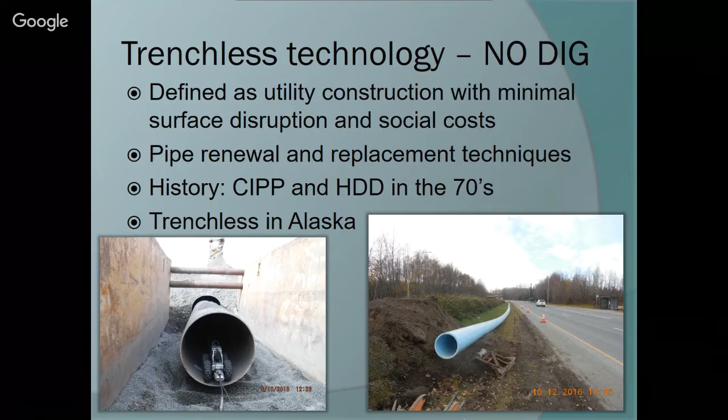I'm just going to go through a handful of different technologies. The first one's going to be slip lining, and this is an old traditional process. It basically is inserting a smaller pipe inside of a larger pipe. The word slip lining is oftentimes confused with cured in place pipe. Slip lining is basically putting a rigid pipe inside of another pipe.

The nice thing about slip lining is it can be done by general contractors. It doesn't require a lot of specialized equipment. You do lose capacity when you do this, your pipe becomes smaller. It's used for sewers, culverts, water mains, a lot of different varied utilities.

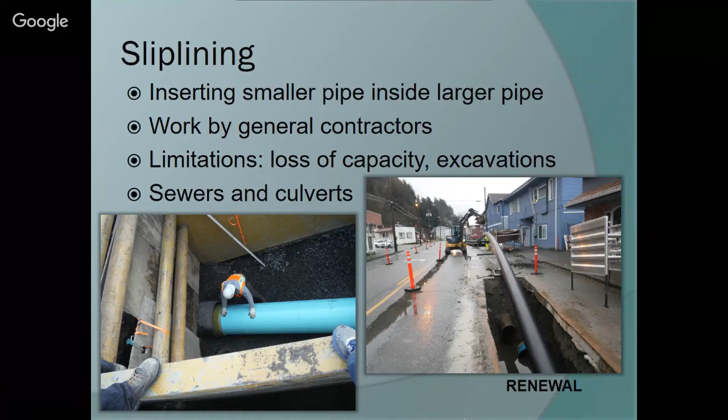In terms of Alaska, slip lining has been done here for quite a while. The first slip lining job I heard about in Alaska was done in Fairbanks in the 80s, when they actually used ductile iron pipe to slip line some techite pipe that was failing structurally. So it's a renewal process that can be done by general contractors.

These pictures here show a couple more slip lining projects. The one in the upper right is a large diameter culvert underneath the runway, where they used a CMP pipe as a slip liner inside of an older CMP pipe that was corroding. The one on the lower left is slip lining in a live flow condition.

This is done a lot in the States. This picture is from some work that was done in Anchorage, where they're able to maintain live flow while they're doing the insertion work.

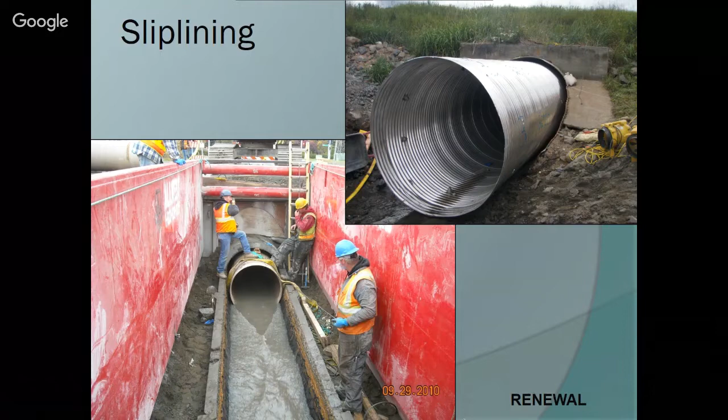Cured in place pipe. This is probably the most popular rehabilitation method in the world in terms of the trenchless world, and this is really one of the technologies that kicked the trenchless industry off, when they were able to find a way to repair pipes in the ground without digging holes. Mostly used for sewer applications.

It is being used for water applications now. You're basically taking a felt tube that has resin impregnated in it. It's soft, inserting it inside of a host pipe, and then using heat or light to kick the resin off, and it expands against the pipe wall and becomes hard, basically just like a hard sock inside of the host pipe.

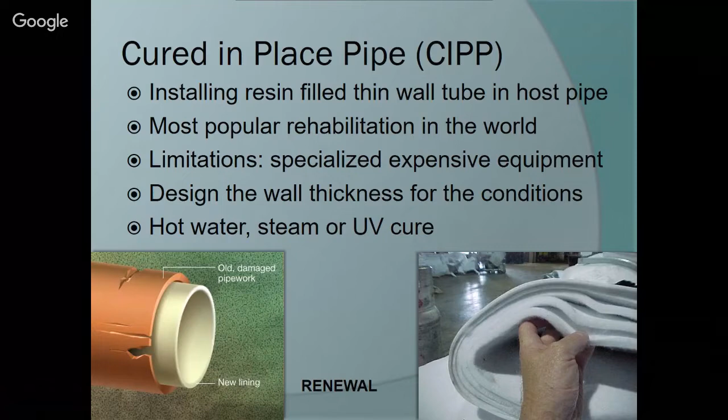It takes specialized equipment in most cases. As an engineer, you're designing the wall thickness of this liner to fit the conditions. It can be cured with hot water or steam, and nowadays there are newer processes where they cure liners with light trains. I'll have some pictures on the next slide that'll show that.

On this slide, the picture in the upper left is a UV liner before installation. In the lower left, you've got the light bulbs used during the UV liner curing process. The photo in the upper right is the more traditional insertion process, using water to insert the cured in place liner inside of a sewer pipe. The picture on the lower right is another photograph of a UV liner being inserted into a sewer main up in Fairbanks. Again, this is the most popular trenchless technology in the world today.

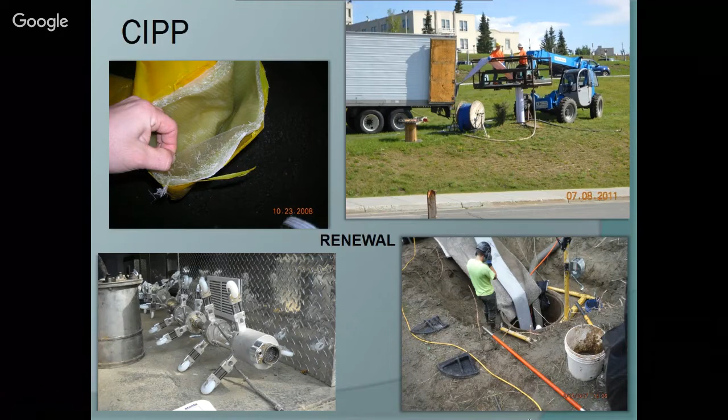On to the next one. So water CIPP is an offshoot of cured in place pipe, and it's a technology that really came into its own around the year 2000. It's semi-trenchless.

It does require some digging. You can see in the photograph in the lower right here where they have dug a pit to reach down to the water main, cut the water main apart, and they're inserting a liner into it. This was actually a water main that was lined out at the Anchorage airport. The picture in the other photo shows a water liner inside of a water main, the end piece of it.

They use epoxy resin in these liners for the most part. You can see in the lower bullet here some of the companies now doing it. You've got Aquapipe, Saertex which is a UV cure process, Nordipipe which is a system used exclusively in Canada, and then RS Technik, which is one of the newer players in this game.

This is a maturing industry. It really took off about 18 or 20 years ago, and it's becoming more and more popular as time goes on. Anchorage has actually done quite a bit of water CIPP work, and in the early years was one of the cities that did more of it than most other communities in the country.

Yeah. Yes. What's the difference between CIPP and water CIPP?

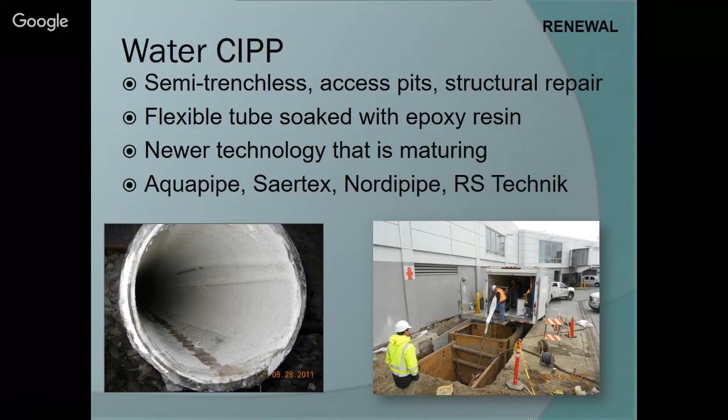Another part of water CIPP work is service reinstatement, and they can do this robotically without digging up the services. The picture on the right shows the robot going through the different steps, and the photo on the left is the robot itself. The driver observes it with a camera, positions it over the service, drills into it, and opens it back up with a drill tool.

They do the same thing in sewers too. When they install a CIPP liner inside a sewer, they can reinstate the service with a robot from inside the pipe and don't have to dig a hole. That's one of the beauties of that technology.

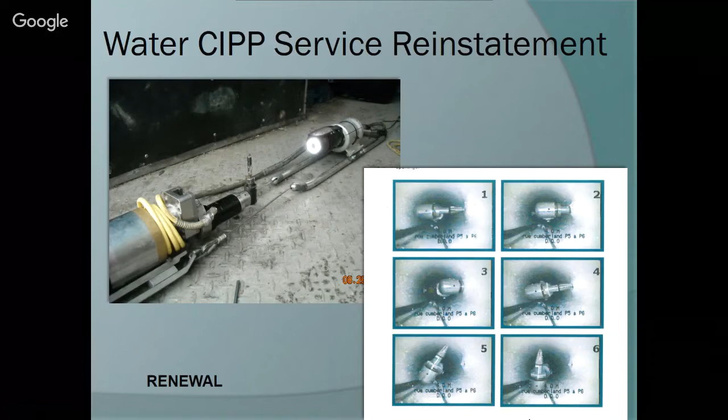Another technology in the trenchless industry is fold and form. It's a process used in specific situations. It was used in Fairbanks quite a bit about 20 years ago — College Utilities bought the process and did a lot of fold and form work within their sewer system where they had a global failure of some pipe.

Basically, you take a piece of PVC, heat it up, bend it, push it inside the host pipe, and then expand it. When it cools down, it stays in place and expanded against the host pipe. U-Liner is one of the more popular fold and form companies. This process is used in sewers and culverts. They've had some issues over the years with bonding or separation from the host pipe and shrinkage, but it's still in use today.

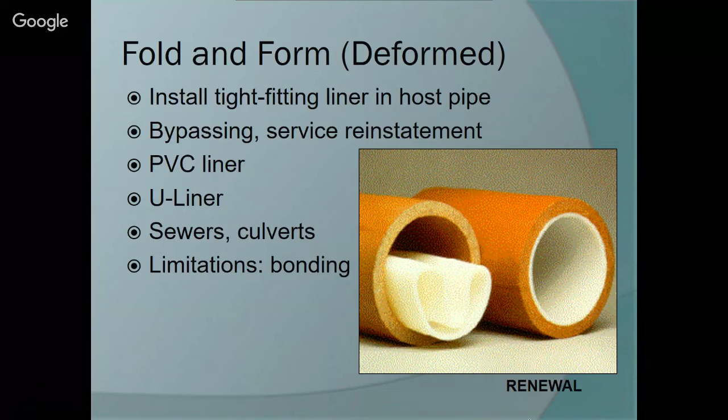Another trenchless technology is the tight fitting liner. This isn't a real mainstream process — it's a pressure pipe application a bit similar to fold and form, which we just talked about.

Sometimes it's called swage lining. They take a piece of HDPE pipe, fold it or shrink it to make it smaller, then pull it into a host pipe, and it goes back to its original shape over time. Depending on the thickness of the HDPE pipe used, it can either be a structural or non-structural repair. It's used a lot around the world in transmission mains and gas lines, in pipelines without service connections. It has been used in Alaska — I heard from an engineer at BP a few years ago who said they'd done some tight fitting liner work up on the North Slope.

So it's a technology you may never use, but it's out there.

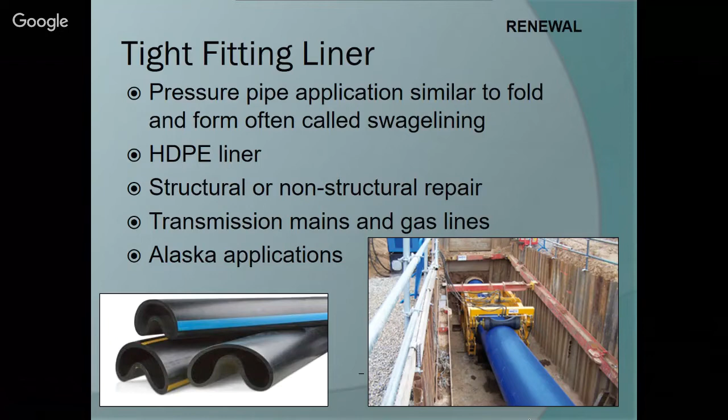Spiral wound is another kind of crazy technology used in our business. In this method, they take a thin piece of PVC pipe and spiral wind it inside of the host pipe, and as it's being sent down it locks in place with itself — you're basically building a pipe inside of a pipe.

It's used quite a bit in culverts. It doesn't fit tight against the host pipe, so they end up grouting the annular space between the liner and the host pipe to create somewhat of a structural repair. I've never seen spiral wound used in Alaska, but I think at some point it probably will be, considering a lot of culverts in Alaska are getting older and deteriorating. There's a high probability you could end up seeing this technology come to our state.

I've never personally worked with it, but I think it has a lot of possibilities.

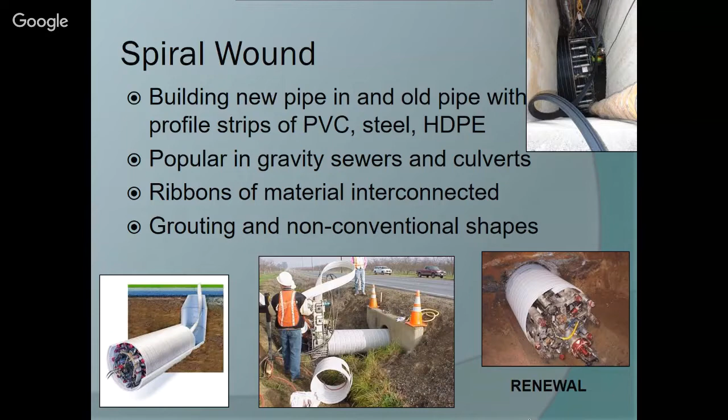Coatings is another offshoot of trenchless technology. It's basically coating the inside of a structure that's maybe part of a project. There's a lot of different types of coatings, and they're non-structural for the most part. You've got cement, epoxy, polyurethane. Some are sprayed on, some are hand applied.

Shotcrete is a system that I know there are tools up here in Alaska for doing, but we don't see it very often. One of the biggest reasons for coating is to corrosion-proof the inside of a concrete structure that may have been attacked from gases or something else.

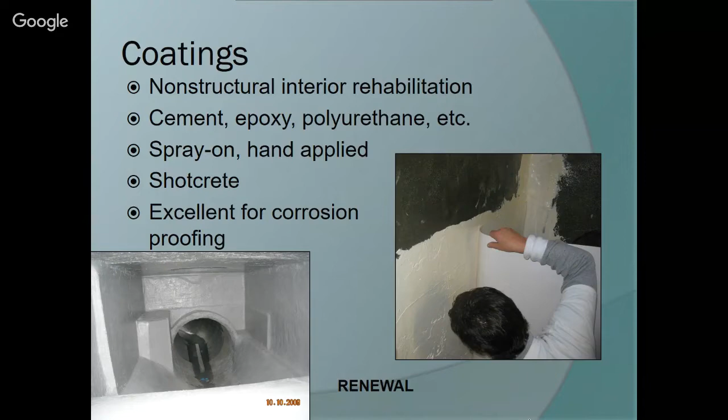Grouting is another aspect of trenchless work, a term that's used for a lot of different things that happen in the industry. It's a real popular tool with a wide variety of different types.

If you look at the pictures here, the photo on the lower right is a packer used to inject grout into a pipe joint to try to seal it up and prevent it from leaking. This is an old system that's been around for quite a while. The grout is pumped into the soil around the outside of the pipe, creating a kind of cement mixture that helps seal the pipe and prevent leaking. Grout packing like that is used quite a bit in projects where you're trying to prevent I&I from entering a pipe system.

The photo on the lower left is a slip lining project where grout was used to fill the annular space between a slip liner pipe and a host pipe. That's a cement-based grout, used a lot in Alaska on slip lining projects and other projects where you need to fill some sort of a gap, where you need a flowable product that can fill the gap.

In the photo in the upper right, grout's being applied by a worker inside a manhole, using grout to stop leaks and stop water from coming into the manhole. He's injecting the grout with a small handheld pump, pushing it into the soil around the outside of the manhole. It solidifies and slows the water down from entering inside the manhole — just one of the various aspects you see from using grout in our business.

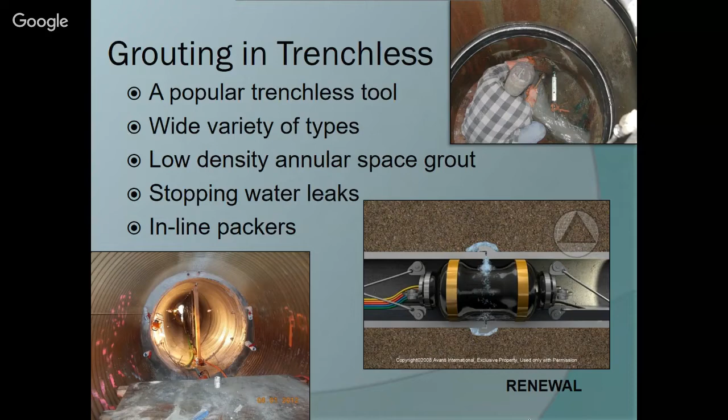Point repairs is one part of the trenchless industry that's growing. A lot of utilities are buying their own point repair equipment and using it to fix their own lines. It's something that workers can do. This is basically a short section of cured-in-place pipe used to repair a defect on a pipe that might otherwise be in good shape.

The way these things work: the crew will have a bladder system that's maybe 3 or 4 feet long, or whatever length you want. They'll put a piece of cured-in-place liner around it that's still soft, drag it into place, position it over the leak, inflate the bladder, and it presses the patch — the little piece of cured-in-place pipe — against the defect in the host pipe.

A camera's involved, and sometimes you have to control the flow when you do that, but it's an inexpensive way to fix a pipe that's otherwise in pretty good shape. It also prevents digging in places where you may not want to dig, for example in busy roads or other places where there may be a lot of activity on the ground surface.

I think AWW has their own internal point repair system, if I remember right. Yeah. So, very low cost, very popular now with utilities — we see more and more of these coming into the state.

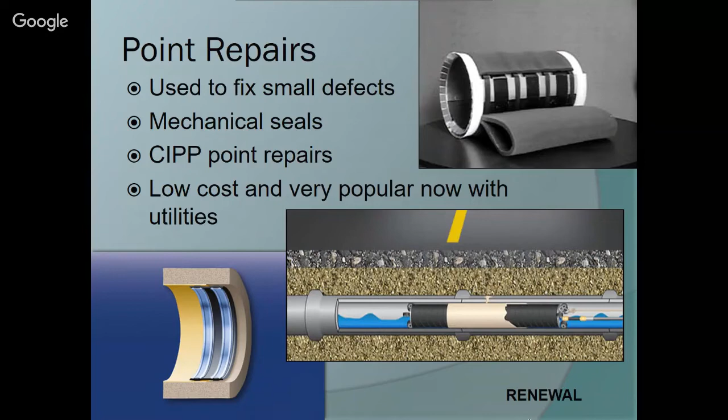Directional drilling: this is a pipe replacement system for installing a new pipe in a new location.

You heard me talk a little bit about fixing existing lines. Now we're getting more into installing new pipes, which is a huge part of the trenchless technology industry.

Directional drilling really took off in the 70s, and really kind of launched the trenchless industry today. It was a big part of it.

You see directional drilling done in a lot of places, and we see more and more of it in Alaska. This is a surface-launched drilling system that can be guided, and it's steerable. It has a lot of flexibility in terms of where you can put a new pipeline.

There's drilling mud involved in it. The mud is used to remove the cuttings from the hole that they're boring, and it's also used to pack the hole to hold the soil in place as you're drilling underground.

There's electronic tracking systems that are used to track where the boring head is going. It's fairly accurate, real popular for new water pipes, sewer lines that are at a steep grade. It's not really good for sewer lines that are at flatter grades. You see a lot of electric and telecom wires being installed with directional drilling rigs now.

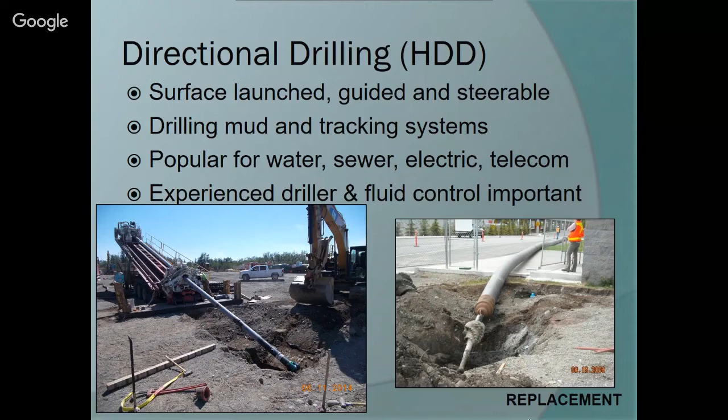For HDD, it typically can go up to about 48-inch diameter. Yeah, in the HDD business, they keep installing bigger pipes at longer lengths.

But they do some pretty cool stuff with HDD. It really shows up in river crossings and so forth. In the last 7 or 8 years, on long river crossings that might be 6,000 to 8,000 feet long, they're so good that they can drill from both sides and make a connection in the middle of that bore path with two different drill paths. They don't have enough strength in the drill rig to drill from one side of the river to the other because it's too far away, so they have the ability to come and meet in the middle and hook up in the center of the bore path underneath the river. Pretty impressive.

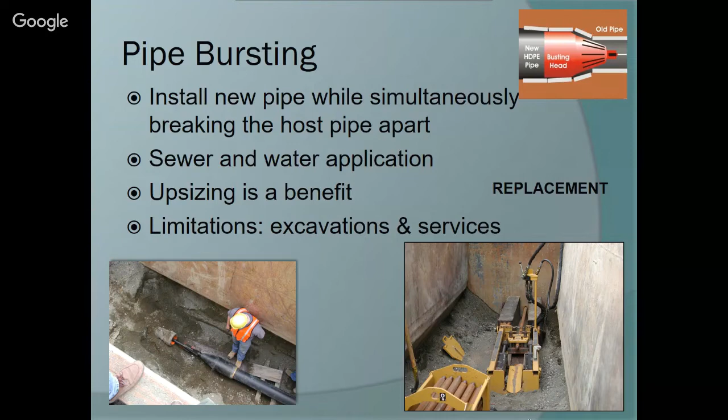Auger boring is a boring system that probably a lot of people in this room are familiar with. It's been around a long, long time. It's an old system where the auger boring equipment basically pushes a casing in place and uses an auger to remove the soils as they're pushing the casing forward.

It's done a lot under railroads or roadways. Auger boring is awfully limited in length—maybe 100 to 150 feet might be the optimum length. Diameter-wise, auger boring typically can reach up to about 54 inches in diameter.

One of the downsides is you have to dig a pretty large pit. The auger goes in a straight line, casing goes in a straight line—it's really not steerable. What's important is that you get it on the line and grade that you want when you first start, so that it ends up roughly in the place you want when it gets to the other side or the end of the bore.

There's some limitations with high groundwater or loose soils—auger boring tends to have problems with those kind of soils. So there is auger boring equipment in Alaska, and it's used quite a bit. The equipment here has done quite a bit of work over the years.

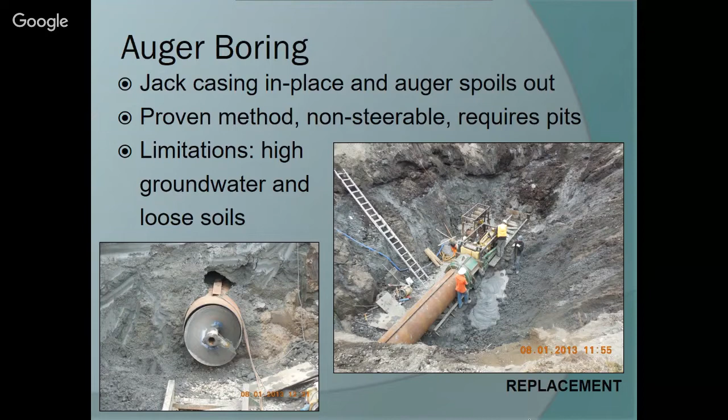Pipe ramming is a little bit like auger boring. You're digging a pit to lower the equipment into. It's a non-steerable technique for the most part—you're pushing a casing into place. The difference is that the casing's pushed in with a pneumatic hammer, whereas with auger boring, it's actually pushed in with jacks, by brute force.

Pipe ramming is a pretty cool technology. It hasn't been used a lot in Alaska, but I really think it's going to grow here—we'll see more of it. It's oftentimes less expensive than auger boring, and I really think we'll see more and more of pipe ramming as time goes on here. One advantage is it can be used for pretty large diameters, up to 12 feet.

What they do is they just push that casing in with brute force. And then once it's in place, if it makes it from one end to the next all the way through the bore length, after the pipe is in place, they go inside of it and pull the soil out. Depending on the size of it, they'll use different equipment to remove the soil. One advantage is that you really minimize the potential for creating any voids in front of the pipe ram.

It's also pretty successful with tough soils that might have a lot of rock in them. Essentially, they'll beat this casing right through rock or any kind of marginal or tough soil.

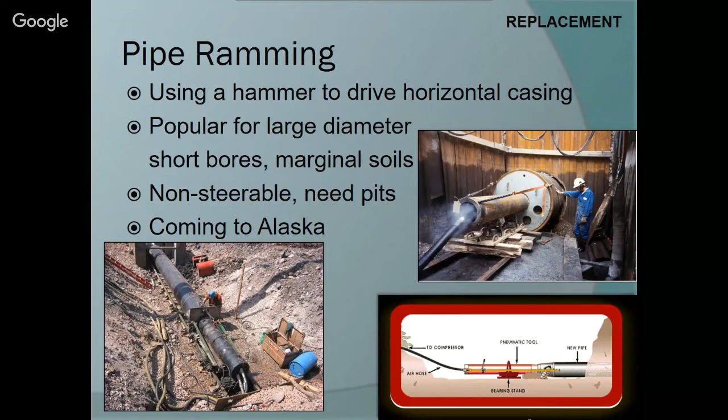Microtunneling is pretty cool technology. I don't know that there's ever been any microtunneling done here. It's very popular in the lower 48, especially for long, deep, large diameter pipelines, where big cities are trying to go from one point to the next. They'll use microtunneling to basically tunnel underneath the city, oftentimes at 50 or 60 feet below the surface, and create a pathway for maybe a large diameter sewer or large diameter water pipe. It comes in a lot of different sizes. You can see from the photo in the upper right, these are a bunch of different microtunneling rigs all lined up next to each other. And it's controlled remotely, different than tunneling where you might have a person in there.

Non-entry. The cuttings are removed either with a slurry or some other type of process. And as the tunneling machine goes through, a little bit like pipe bursting, they tunnel along, the casing is going behind it, and they're building a pipeline as they're drilling along. One of the biggest advantages is it's guided, so you can keep it on grade or where you want it to be.

They sometimes do get great accuracy, and with microtunneling, you can drill through almost any type of soils. I've seen projects where, like I said earlier, microtunneling is often used for deep, large diameter pipelines in cities where they have a lot of congestion on the ground surface. But I also saw a presentation where they used it on the East Coast in an older colonial aged community.

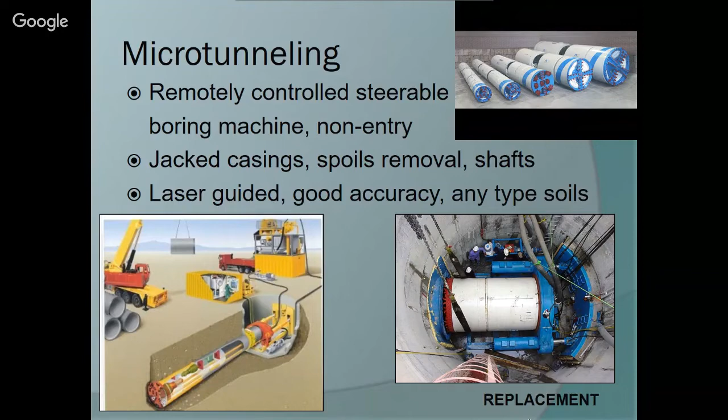Pilot tube microtunneling sounds the same, it's like the question you asked about CIPP. But this is more of a smaller diameter system. This is a laser guided boring limited to about a 500-foot length, for small diameter pipes and pits.

You need to have ideal soil conditions to use PTMT. Very accurate, popular for on-grade sewers, especially in the States where you want to put a pipe in from one point to the next in the middle of a city, for example.

The tooling, the equipment itself, doesn't take a large pit in some cases. The picture on the lower right shows pilot tube microtunneling equipment that fits about in the size of a trench box, a 20-foot long trench box. But in the upper corner is a picture of a microtunneling machine that fits inside of an 8-foot diameter casing. So it's used a lot, like in cities where you don't have a lot of room to maneuver.

They will construct a vertical casing, drop in this guided tunneling equipment, and they'll bore whatever distance they need to go, usually 300 to 500 feet. And when they're doing this, the augers and the casings are all very short, so they put them in short segments, one by one, as they move ahead and move back.

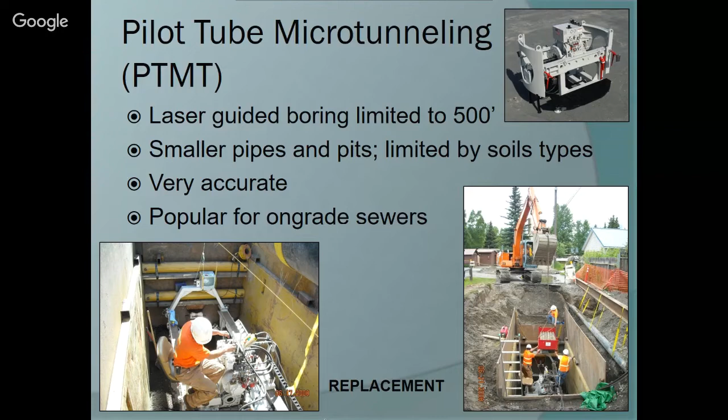Piercing is basically a pneumatic hammer that drives itself through the soil, unguided, and it's real popular for short electrical and telecom wires. I want to say maybe less than 30 to 40 feet.

This equipment is used in Alaska. I've never personally worked with it myself, but these hammers come in a bunch of various sizes, and they're driven by air, so they just pound their way through the soil. They're not pushed with any kind of mechanical equipment; they just walk through the soil themselves, and they're non-steerable. It's pretty crazy, but you don't really know all the time where they're going to end up at.

We've heard some funny stories about the piercing tool popping up out of the ground surface 20 feet from where it was supposed to go. In the States, or places with fine-grained soils without a lot of obstructions like gravel, it's probably a lot more successful, but it is used here.

It's just one part of this industry that's adaptable to the electrical and telecom industry.

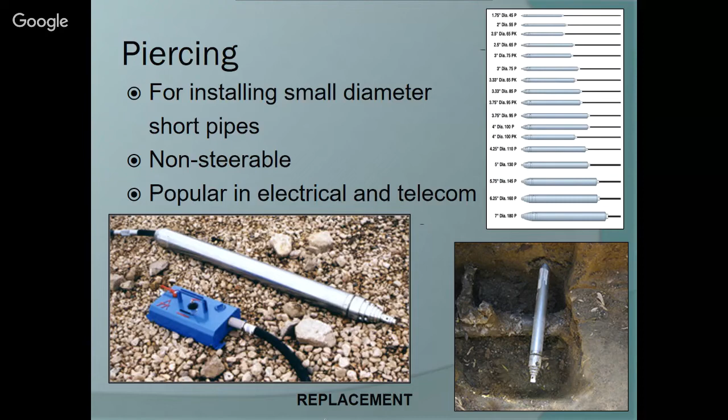A real interesting type of method for installing new pipes or new wires in the ground.

Another facet of the trenchless business is condition assessment. This is really about, if you've got a pipeline, trying to figure out what's wrong with it before you go to fix it. There are a lot of great tools nowadays for doing condition assessment, especially with the way electronics are being improved all the time.

It's important because engineers, to make a decision on how to fix something, need to know what the problem is. So cameras are probably the most used tool in condition assessment.

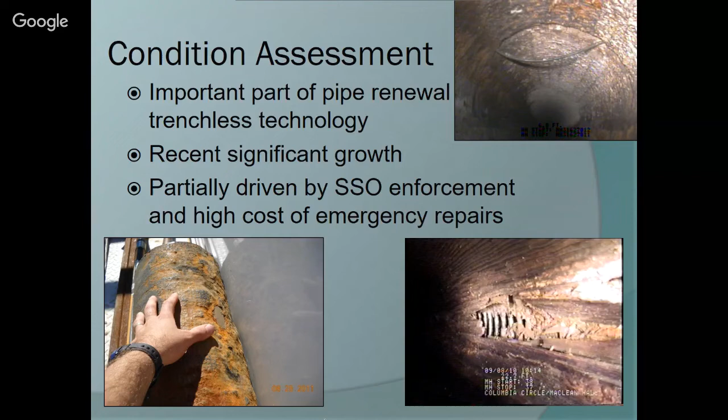I've got a few more slides on this that I'll show you that explain a little bit more about assessment.

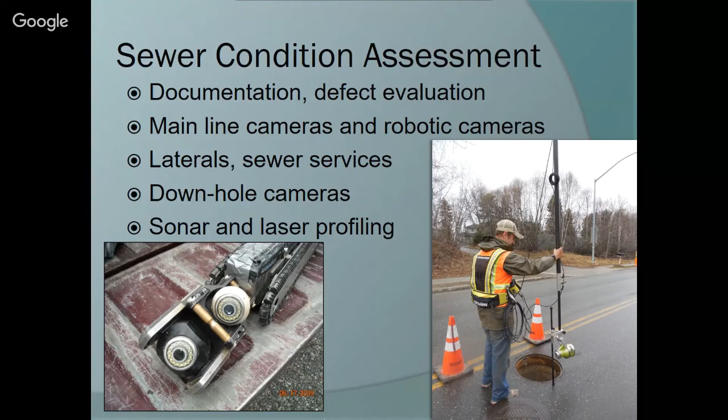In Anchorage, we're seeing more and more of these downhole cameras, and some small communities are starting to buy them too. Real useful tool, especially today when you have rules about climbing inside manholes and so forth that prevent you from doing that very easily.

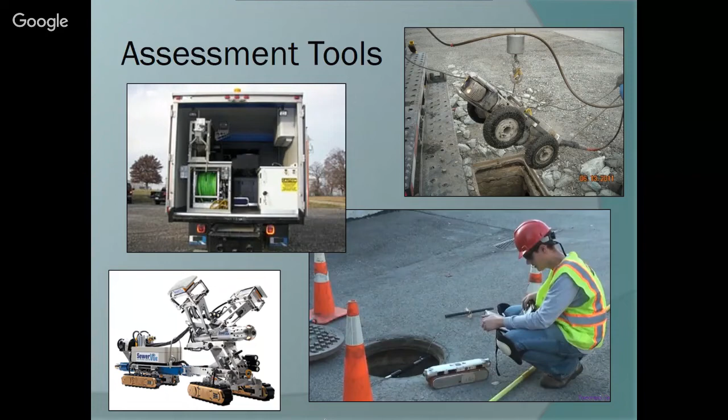Water condition assessment: there are a lot of new tools for assessing water pipes. Cameras are used. Oftentimes you have to stop the flow and open the pipe up, but there are cameras nowadays that can access water mains through hydrants when the pipe is still under a live flow condition. They're developing that stuff all the time.

There's some non-destructive techniques such as acoustic methods, which send signals through the pipe to assess pipe wall thickness. Non-destructive testing can be done by hooking onto valves and other components on a pipe system to send a signal from one point to the next.

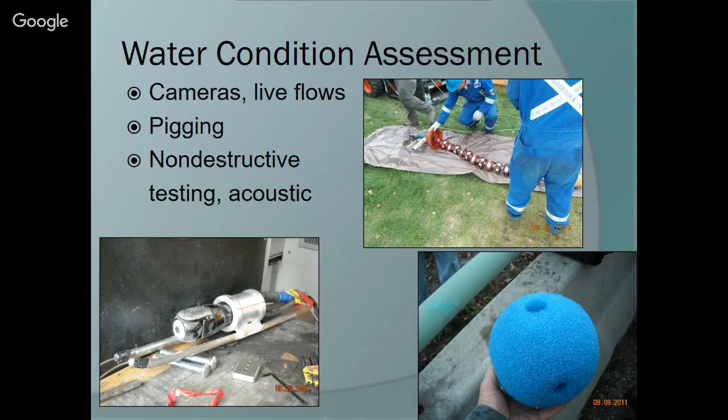Some of the organizations in this industry, and I'm just about done here. NASTT is a real well-known trenchless organization. They have a conference they hold every year in the States. There's a chapter, an offshoot of NASTT, located in the Seattle area.

Another organization that's a lot like NASTT is the UCT. They hold an annual conference and are based more out of Texas and the southern states. And then you've got NASSCO, which is more of a broad association of sewer service companies.

These organizations continue to grow and expand, and they're putting out great resources now, like design manuals and technical papers. A lot of this stuff is available online from these different groups to help people understand what's happening in our industry.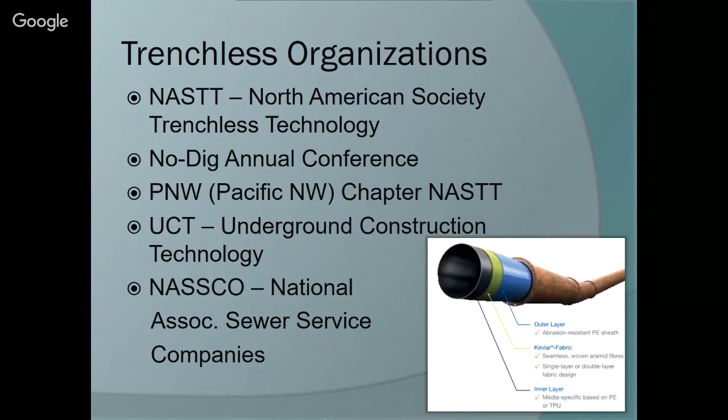One of the biggest advantages of the Primus Line is that it doesn't take a lot of specialized equipment to do the installation work. One of the downsides is that the hose inside is not structural, so it can collapse if you get high pressures from the outside. Anyway, just one of the newer technologies we see here.

In conclusion, our industry is just continuing to advance and mature, and I've been in it so long, I've seen a lot of that firsthand. It's amazing what people can come up with when they look hard at trying to find ways to do things. In our work, you want to often, especially on the drilling side, plan for the worst and hope for the best.

Because when things go wrong, they can be expensive in the trenchless world - for instance, if they're drilling and run into a utility by accident, or didn't do their due diligence to find out what was underneath the ground, there can be some catastrophic damages due to that. We often talk about risk in the trenchless industry, how to manage it and control it.

Fixing defective work can be expensive, and we've seen some projects where liners went in that cured too soon before they had a chance to inflate, and they had to find ways to remove them - oftentimes in places where you don't want to dig a hole. So it's important to do your due diligence ahead of time as much as you can to reduce risk.

I often warn people about being careful with unproven techniques. In an industry with a lot of research and development and new ideas, I've seen a lot of them come and go over the years. It's often important just to verify that they actually are doing what they say they can do, and maybe it's been used elsewhere. And with trenchless work, it's not always the most cost-effective solution.

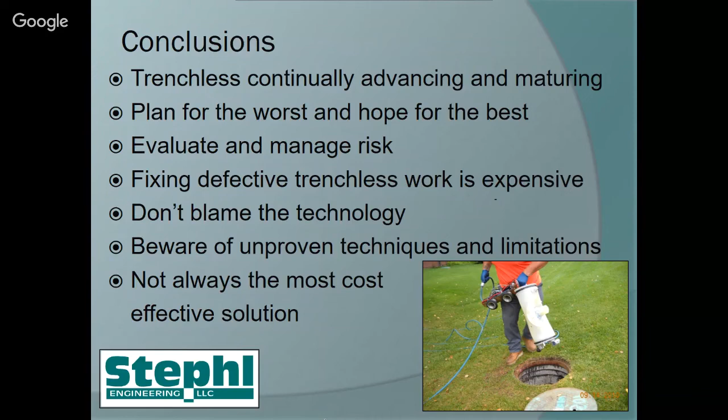In the drilling work, where you're drilling into a new location, if you don't know what the soils are, you're making a big guess on what you might run into. So geotech work is really, really important, especially in horizontal drilling, for example. As engineers, we do an analysis on whether the drill is going to be feasible, looking at a drill path and trying to predict if the drilling mud is going to make it back to the drill rig, or if the pressure is too high and it pops up to the ground surface. That's called a hydrofracture analysis, and the soils are a big component of that analysis. So yes, it's important to get good geotech information.

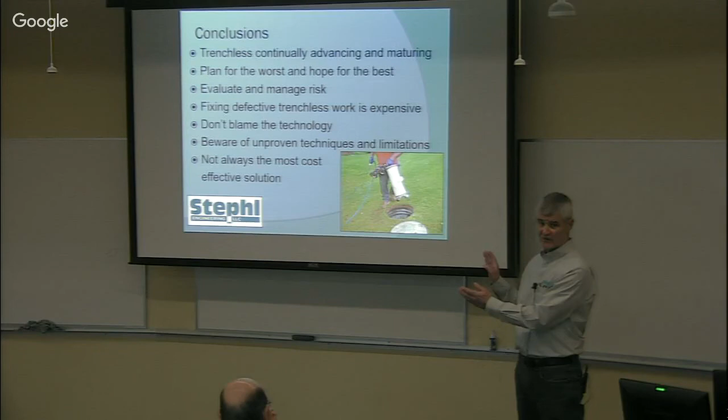Anybody else? Yes, sir? With CIPP, cured-in-place, NSF 61 for water is going to be a big component. That's what drives some of the technology there. So the question is about NSF 61 and how it relates to water CIPP, and you're absolutely correct about that. The lining companies that were in the bulletin for water CIPP all provide liners that are NSF 61 rated. That was a big deal in the early part of that industry, because the water CIPP liners were developed and used in Canada, and in order for them to move into the US, they had to get NSF 61 certified. They all went through that process.

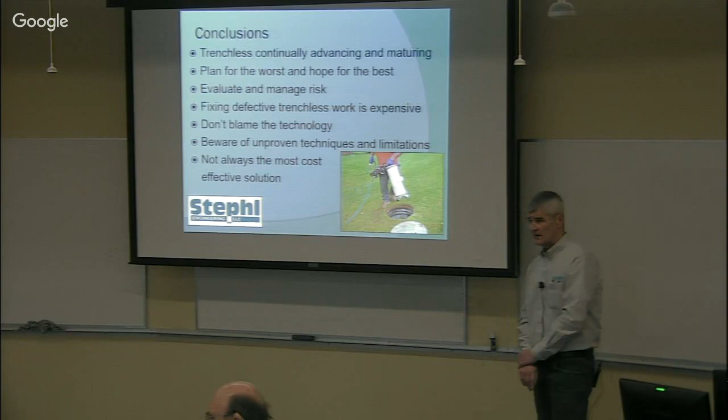Yes, sir? I was on a project not long ago where they ran a pipe under the road, and they pulled out more material than they needed, so it settled. Is that a common occurrence, or is there a way to measure your mud and soil to get back so you know? So you were on a drilling project where they created a void during the drilling process. Do you remember what technology they were using? No, I don't, I didn't get there.

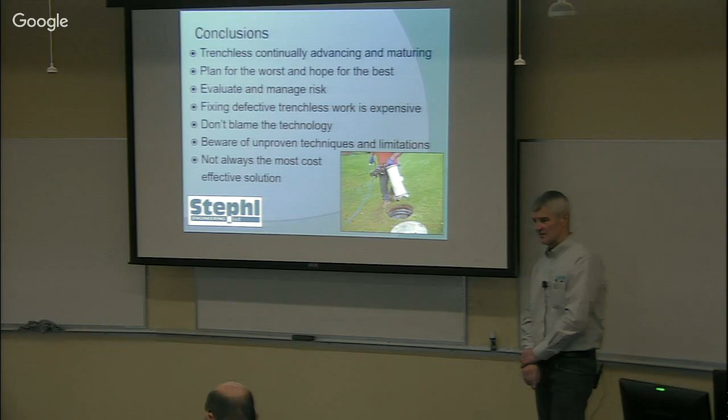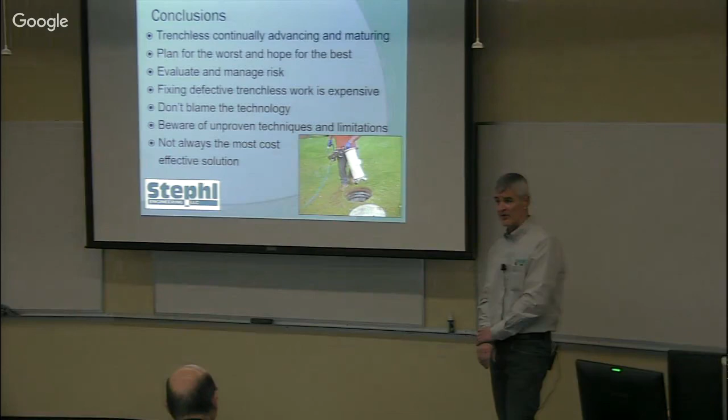Yeah, and that's a real concern, and there are ways to control that. Maybe they had the wrong technology in the first place. For example, if you're using auger boring underneath the road, auger boring really doesn't work well in places where you've got groundwater or running soils, because the soil will just start to run into the casing and create a void. So that may have been part of the problem. If there are issues where a contractor creates a void, he has to go back and grout it up, or find ways to stop the soil from entering the casing. So yeah, it's a big concern. You'll see designs where they'll require you to measure the surface above the bore path before and after the bore and monitor the settlement. So horizontal directional drilling under runways, for example, they want to see settlement calculations before you ever drill.

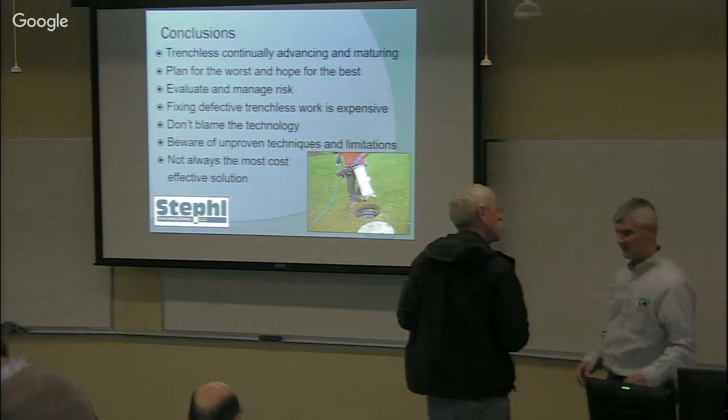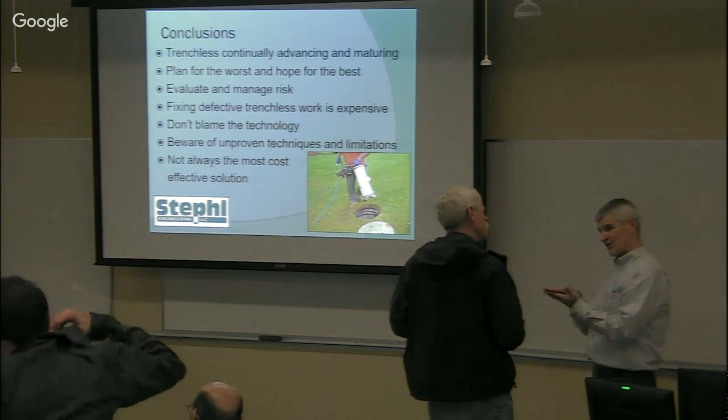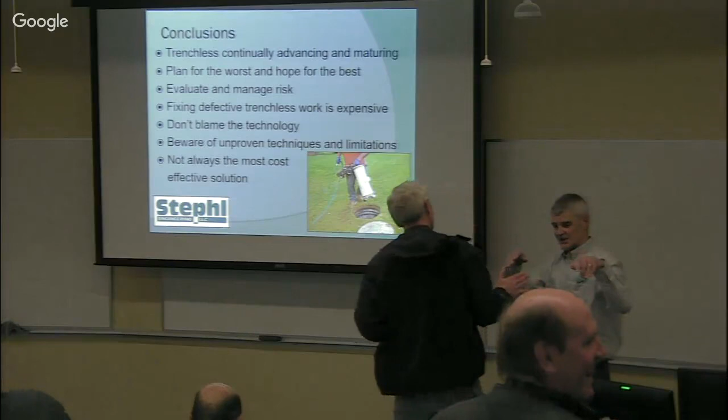That one, that's auger boring. They actually have a way to steer that. On the very front of the casing, they have little gates that open up, and they control them with pneumatic hoses, so that little channel had air hoses in it. So like you might have a casing that's big, and they have these little deflectors that lift up and push it this way. All it does is create resistance and tries to steer it one way or the other.